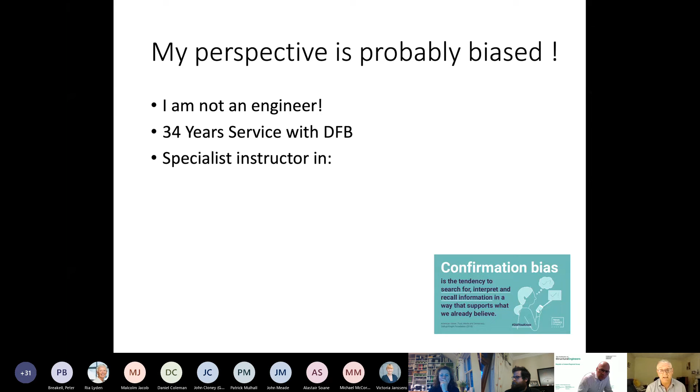I just want to tell you from the start that my perspective on this is most probably biased, because firstly I'm not an engineer, and I'm looking at this from a point of view diametrically opposed to yours. I'm in my 34th year in Dublin Fire Brigade, and my specialist instructor training is in compartment fire behaviour, tactical ventilation, breathing apparatus, and of course high-rise firefighting.

My first exposure to high-rise firefighting in terms of training was in the Petronas Tower in Kuala Lumpur. It's like learning how to fly a little bit in an F-16. So that was an interesting experience.

So what I really want to talk about is the project that I'm leading in Dublin Fire Brigade regarding how we're going to really deal with the changing built environment here in Dublin.

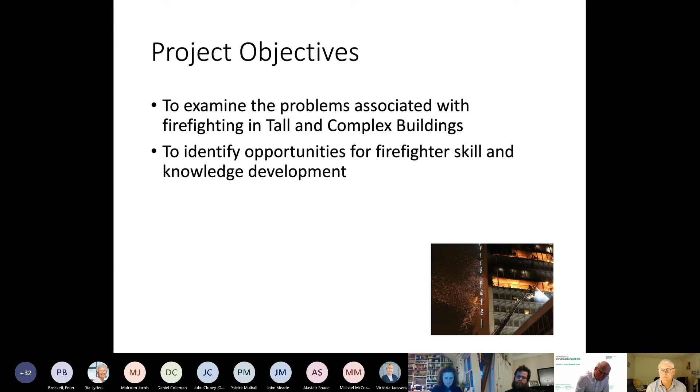Basically what we try to do is examine the problems associated with tall and complex buildings firefighting. We also identify opportunities for firefighter skill and knowledge development—that's a really political way of saying figure out what we're not very good at. We also wanted to implement a robust procedural and policy-based process so firefighters could operate safely in the changing modern built environment. So that was the overview of the project.

The very first question we had to ask is, what is a high-rise building? So we initially started by looking at Dublin City Council's development plan running from 2016 to 2022. If you look at the bottom of that table, they estimate low-rise runs up to 28 metres, medium rise up to 50 metres, and high-rise buildings over 50 metres.

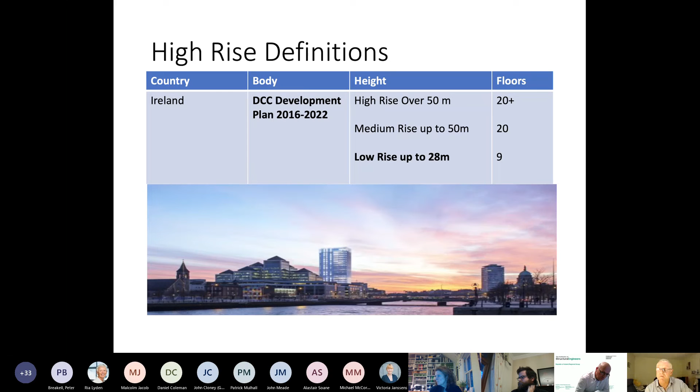When we started to look at that, the first thing that struck us was that the National Fire Protection Association in the United States classifies a high-rise building at over 23 metres. So immediately we started to think, why is one of the most experienced organisations supporting fire officers looking at high-rise at a much lower level than Dublin City Council?

To help us understand that better, we looked at the way they were zoning the city. If you look at the green area on that diagram, that's the zone for up to 28 metre buildings. The two purple circles are where Dublin City Council are going to build what they consider high rise—at Heuston Station and down at the end of the quay wall at Capital Dock. The other parts of the city, in the reddish pinkish colour, can build anything up to 50 metres. So in essence, the entire city is going to become a tall and complex city from our point of view.

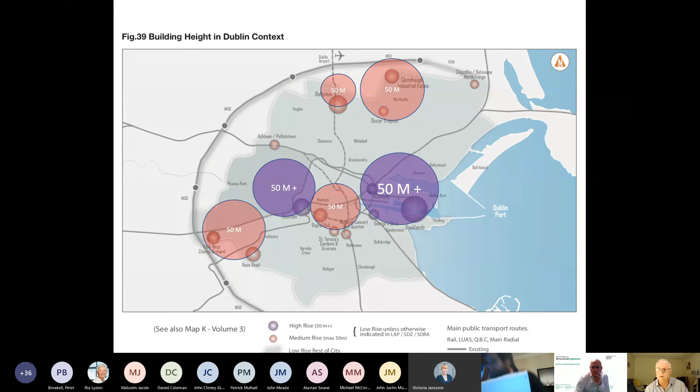So really we had to have a conversation with Dublin City Council, because they really pay for the fire service in Dublin. The conversation really was: how does the fire service define high-rise buildings as opposed to their perception?

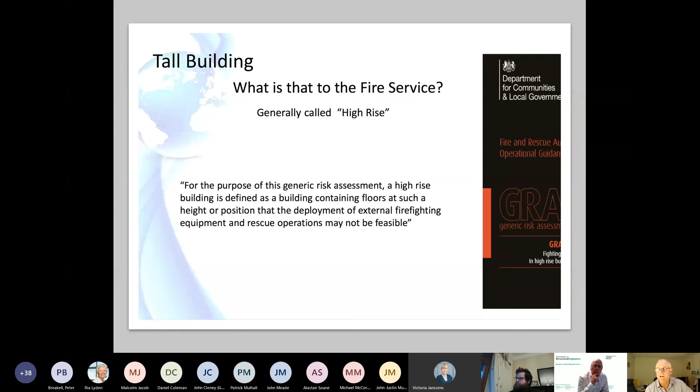So the starting point was our nearest neighbour in the UK, and their generic risk assessment says that for the purpose of this assessment, a high-rise building is defined as a building containing floors at such a height or position that the deployment of external firefighting equipment and rescue operations may not be feasible. That was really starting to look at high-rise from the perspective of the fire service, in terms of their capability to reach these buildings from the outside with their aerial equipment.

So we decided to look at the other side of the Atlantic, and one that really appealed to us—and ultimately to Dublin City Council—was Ottawa Fire Service's definition of tall and complex. In compliance with the British outlook, they define it as a structure beyond the reach of fire department aerial equipment because of height, setback, or location; structures that require unreasonable evacuation time; structures that pose a potential for significant stack effect, which I'll talk about later in more detail; and structures which require high-rise tactics. This could be buildings like hospitals, nursing homes, or buildings with firefighting shafts with provisions for the fire service to use.

So that really opened up everyone's view, and Dublin City Council were much happier then.

Instead of calling it high-rise, they were much happier calling them tall and complex, and so are we. So the key connection between different sides of the Atlantic, from a firefighting perspective, is that the reach of available aerial equipment really presented as the principal metric for defining tall and complex.

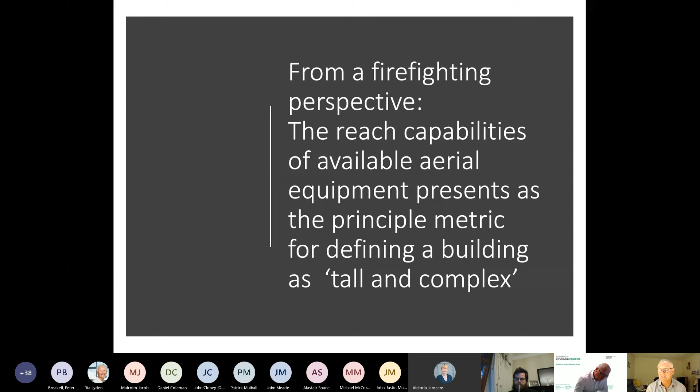So the next obvious question was, well, what can we reach? The tallest ladder or aerial device available in Ireland right now is a 30-metre turntable ladder. And that effective reach, when you allow for where the driver has to position it and the angle we can actually climb, is exactly 20 metres. That contrasts greatly with Dublin City Council's understanding of low rise, which is up to 28.

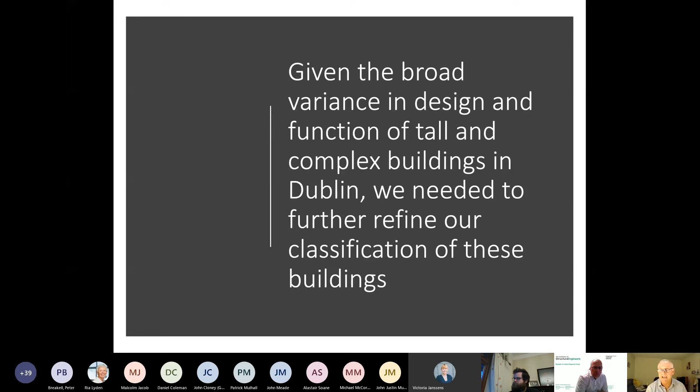Given the broad variance in design and function of tall and complex buildings in Dublin, we needed to further refine our classification of these buildings from the point of view of emergency planning, working out how many people we needed to send to fires in these different types of buildings.

So we broke them up into 3 categories. Type 1 is 20 metres or less, and these buildings we can reach with our aerial appliances. In terms of fire safety provisions, they will have protected stairwells and smoke management systems. They don't actually need to have rising mains.

Type 2 we suggested is buildings over 20 metres, meaning we can't reach them, and they would be residential only. The fire safety provisions provided would, to a certain height, include dry risers, firefighting shafts, firefighting lifts, and if they're over 30 metres, they probably get a sprinkler system. If they're over 60 metres, they would probably get a wet riser.

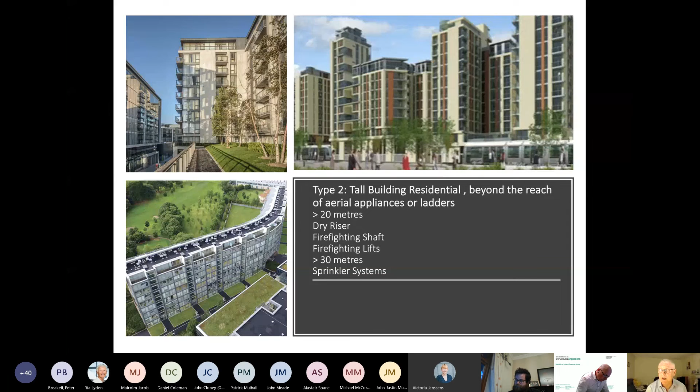Type 3 we said is a combination of either all commercial or mixed development, and it would have very similar features to type 2. The big difference from our point of view is the introduction of open plan office areas, which really changed the way we put out fires. We'll talk about that later.

The next section I'd like to talk to you about is our problem with fires in tall buildings, and the first thing I'd like to emphasize is fire behaviour in these buildings. To refer back to my background, I trained in Sweden in compartment fire behaviour, and I would have thought, up to the point I got involved in this, that I had a really good understanding of how fire actually behaves within buildings.

But to give you some background, Dublin Fire Brigade had a really solid culture of educating firefighters in the very latest understandings of fire behaviour. But it's probably fair to say their education was focused on fire behaviour in single residential style compartments, because that's where we do most of our work.

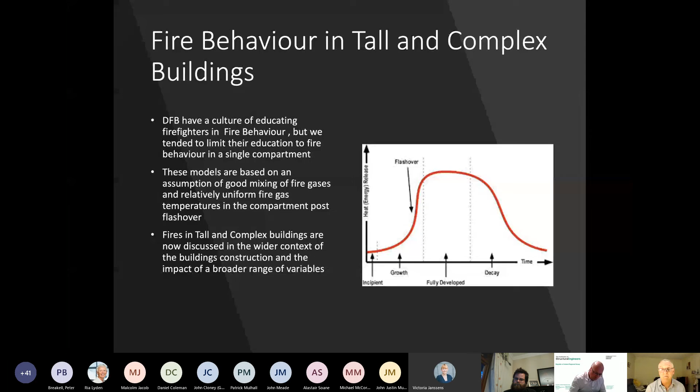The fire development or fire behaviour models that we used, and I believe you guys use as well, are based on the assumption of good mixing of fire gases and relatively uniform fire gas temperatures in the compartments post-flashover. Fires in tall and complex buildings are now discussed in our world in a wider context of the building's actual construction features and the impact of a broader range of variables on fire behaviour.

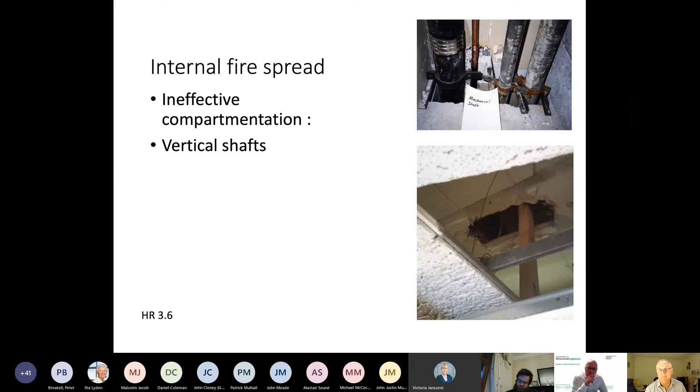So the question then would be, well, what are these variables? The first thing I'd like to talk to you about is internal fire and smoke spread in tall and complex structures. The first thing I would say, and this would probably be very much bread and butter to you guys, is ineffective compartmentation, really brought about by vertical shafts, unprotected service openings, ductways, faulty fire doors, and so on.

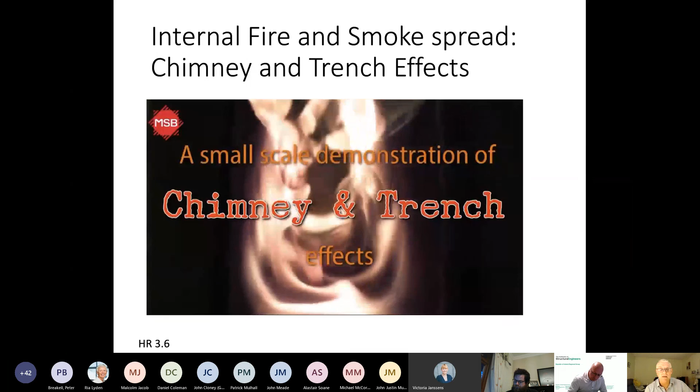But I would just like to add this short film to broaden our understanding. This short film comes from Sweden, and it describes fire behaviour inside structures that would produce chimney and trench effects. What they used to demonstrate this was basically two pieces of wood configured in a tubular fashion, one with a U shape and one enclosed. They started a fire at the bottom of these structures, which would represent stairwells and ductways in tall and complex buildings.

The first thing that we noted when we looked at this, particularly in the one without the four sides in it, was the speed at which the fire developed up this type of trench.

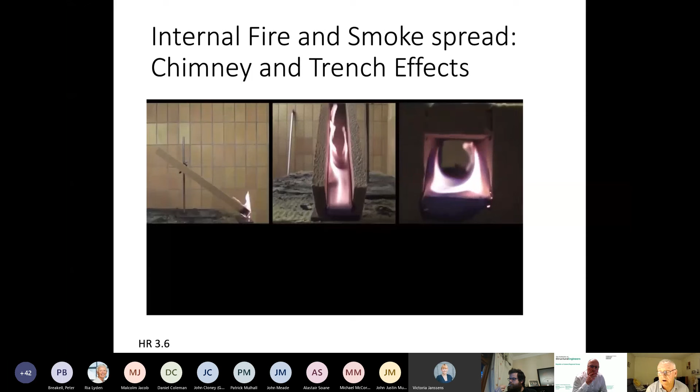Some of you might be familiar with this because this particular phenomenon was discovered in the King's Cross fire, where fires were developing up escalators at an incredible rate that hadn't really been characterized before. The fire on the right-hand side would be fires developing in shafts, ducts, in some cavities and so on. The first thing we noted was this was not behaving like our understood model of fire behavior.

So from the point of view of identifying areas to evacuate in a building, depending on the height of the building and the time of year, and specifically the temperature differential from the inside of the building against the ambient temperature outside, we could expect smoke movement that was totally foreign to us. When we were evacuating these structures, we realized we had to think about this quite differently.

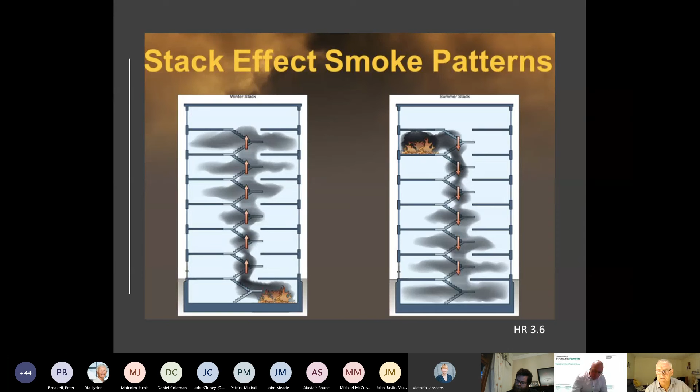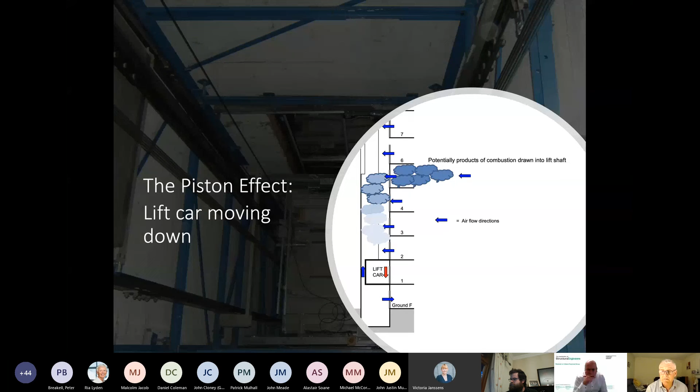The next thing we wanted to talk about was lifts and lift shafts, and the understanding of smoke movement when using firefighting lifts. In essence, the piston effect of the movement of the lift will draw in smoke as the lift is going down, very similar to a syringe and a plunger within a syringe. And as the lift goes up, it was causing smoke to be pushed up into different parts of the building.

Bearing in mind that the normal lifts will be out of function during a fire event, we will be using the firefighting lifts an awful lot during our operation to move firefighters, equipment, and to move injured people down. So again, smoke coming out on floors that we weren't anticipating was something we had to make people aware of.

The next thing might come as a surprise to people in your profession: the negative impact of smoke management systems and ventilation systems within tall and complex buildings. I refer, of course, to smoke shafts and automatic opening vent systems.

The first thing we really want to bring to the table here is the understanding of a concept called ventilation flow paths, and the preponderance of pressurized fire gases to seek areas of lower pressure to move to. The areas they want to move to most readily are the systems put in place to actually stop smoke propagation in the buildings we're trying to protect.

So I'm going to show you a ventilation flow path coming from the bottom of a stairwell to a ventilation opening at the top of a stairwell. The first thing you will note is that the smoke is turning 180 degrees and moving up the stairs, and very little smoke is actually moving out to the vent that's obvious on the right hand side, the door that's open. The smoke is most likely to depressurize towards the tallest or highest vent.

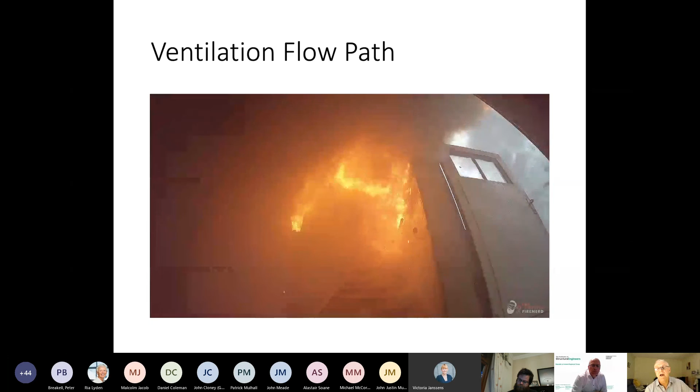Now, as the smoke layer heats up, it's going to ignite, because an awful lot of people don't realize that smoke actually burns. You can see a very clear ventilation flow path forming of the fire gases moving towards areas of lower pressure. Picture in your minds this event occurring where an apartment is left open and the burning smoke is moving towards AOVs and smoke shafts. This is a better indication of what I'm talking about.

On the picture on the right, you can see an automatic opening vent, and the picture on the left showing a smoke shaft.

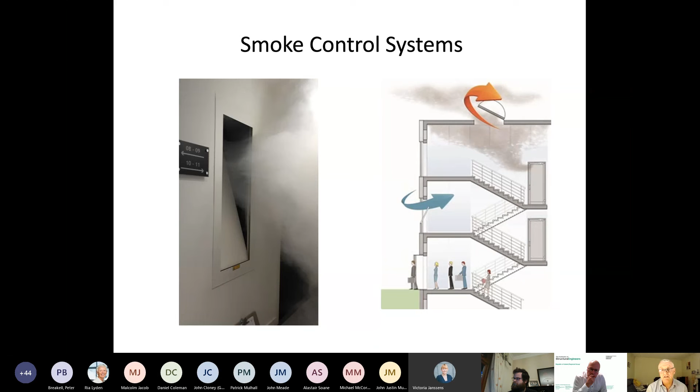If a firefighter was to leave a firefighting shaft and a smoke shaft was functioning, or the door was open into the firefighting shaft and it was feeding the AOV, the flame and burning smoke will be moving towards the firefighter. We would suggest that the smoke shaft is in precisely the wrong position to support firefighting operations. They're placed near the building core, usually for financial reasons and ease of construction, but we would suggest they should actually be placed at the furthest point away from the stairwell.

The next thing I'd like to move on to is the exterior influences on fire and smoke spread, specifically the effects of wind. I'm going to show you a film of a fire we attended on Fenian Street. If you look carefully, the wind is very clearly moving from the right to the left, and there are firefighters inside that building now.

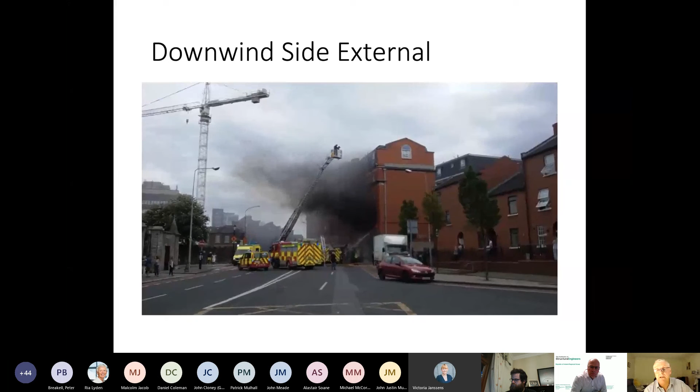It is not following a typical Coanda effect. The flame is moving out horizontally. What I need to tell you about that fire is that a policeman, a Garda, actually broke a window on the upwind side of that fire. And when the vent through window failure opened on the opposite side of the building, basically what you are seeing is this, the flame coming out horizontal.

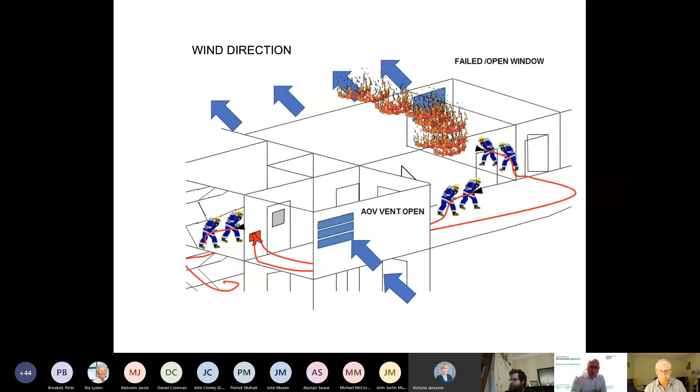What I would like you to imagine is if the wind was blowing the opposite direction, the actual flame would come back at the firefighters, which I'm going to show you later. Wind-driven fires are not uncommon.

I would like you to imagine if a firefighter was coming from the other side and this happened, you would end up with this here. This is a wind-driven fire, and as you guys would know, there wouldn't be a huge fire load in a corridor or a lobby for that matter. What you were looking at was the burning fire gases in a blowtorch effect heading towards a smoke control mechanism.

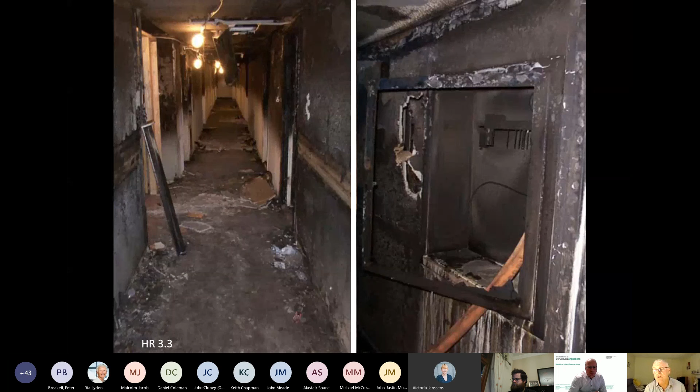I would like to move on to exterior or external fire and smoke spread, and tell you something you probably already know. There are 6 types of external fire spread, and the Coanda effect probably describes the phenomena very well. But I would like you to consider combustible window sets, external ACM or MCM wall cladding rain screens over combustible insulation.

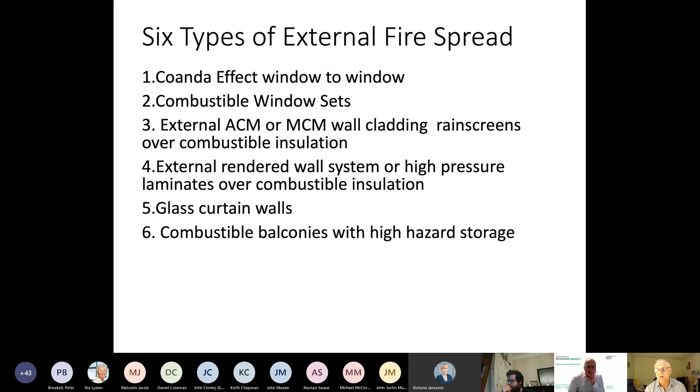I would like you to consider external rendered wall systems or high pressure laminates over combustible insulation. I would like you to consider, in commercial buildings, glass curtain walls. I would like you to think about combustible balconies with high hazard storage. And I'd like you to look at these in a bit more detail.

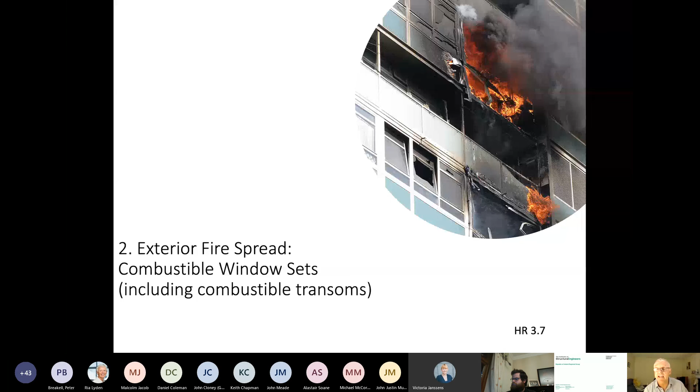The first structural component we are now considering greatly is combustible window sets, including combustible transoms. You're looking at the Lakanal House fire in London in the picture, which was renovated 4 weeks before the fire, and the people who died stayed in place at the behest or instruction of the fire service.

The next one is exterior fire spread, which is pretty much well discussed now: external ACM or MCM wall cladding, rain screen over insulation. This one is not as well noticed in the city as it should be, because it's rendered over insulation that's combustible, and it looks, shall we say, a particularly standard finish to a lay person like myself.

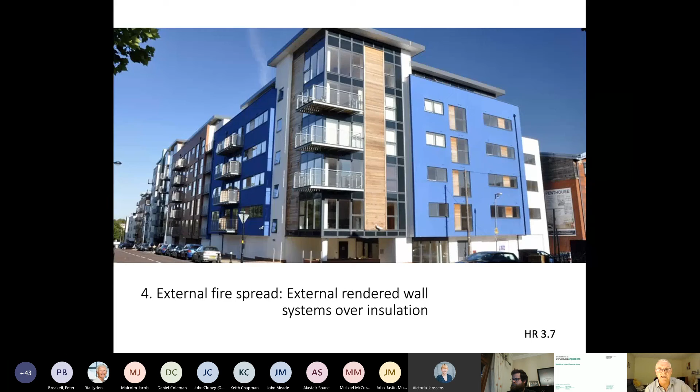The curtain wall phenomenon is common in that if the curtain wall is installed and fire stopping is not installed, instead of having this nice fire stopping function, we get the fire moving from floor to floor up along where the curtain walls are actually attached to the building.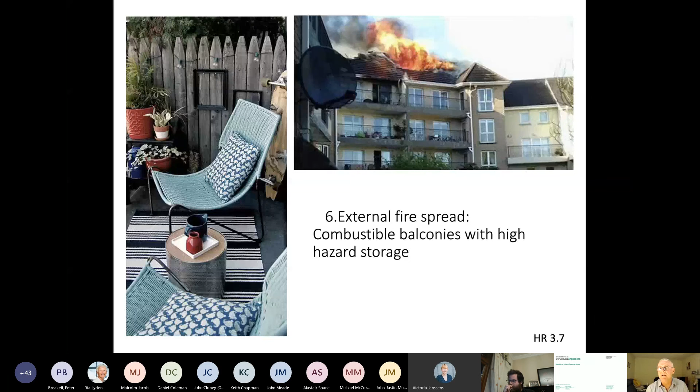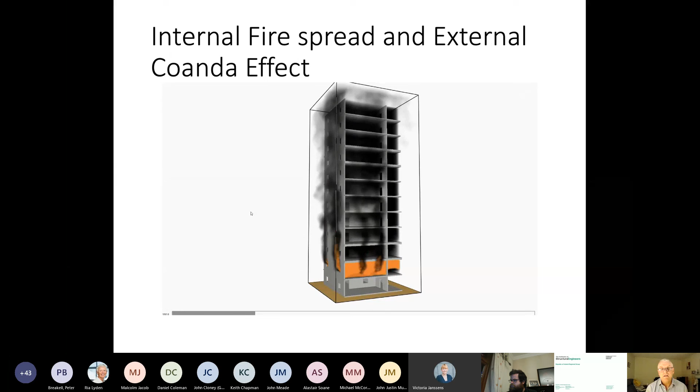So if you take a look at this representation, what we're seeing here is internal fire spread through cavities and voids, through people not leaving or closing fire doors, and you're seeing some smoke moving up along the building, showing a typical Coanda effect.

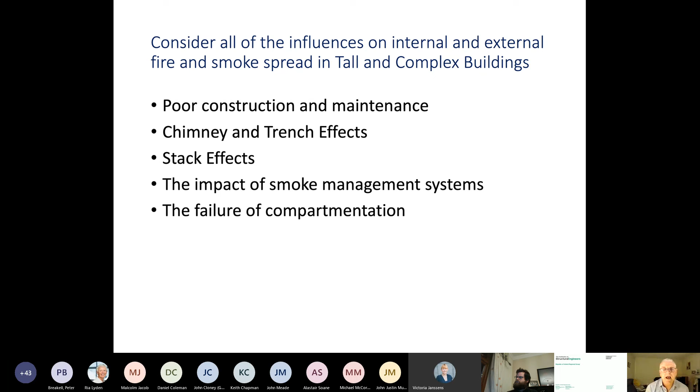So if you were to consider all of the influences we've discussed on internal and external fire and smoke spread in tall and complex buildings, and add in poor construction and maintenance, the chimney and trench effects we discussed earlier, the unusual smoke movement and patterns, the impact of smoke management systems, the failure of compartmentation, the effects of wind, and now add in combustible exterior cladding systems. Now, I should warn you in advance, I'm going to show you a video, and some of the language is a bit choice, but I think it's useful to understand when you combine all of those variables.

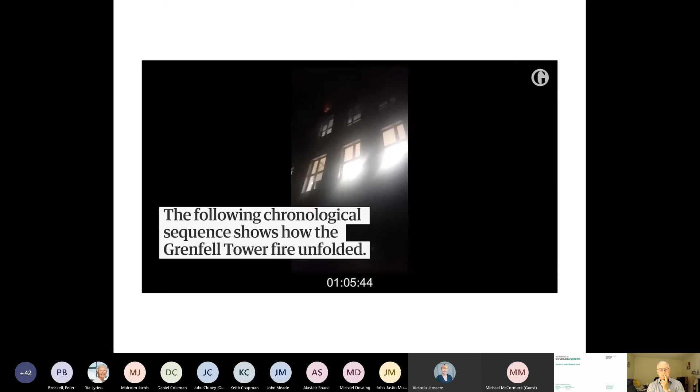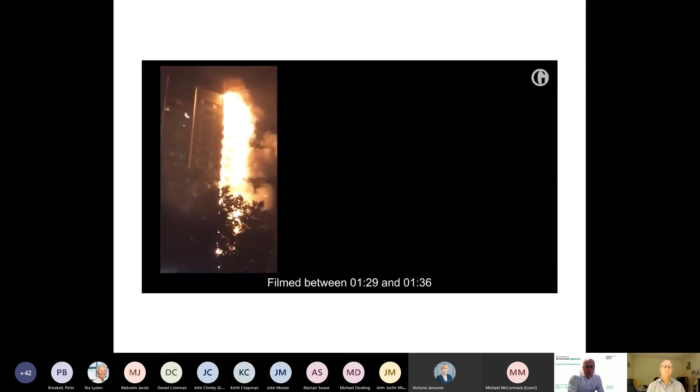Fire Brigade? Yeah, hello, hi, in the fire, flat 16 Grenfell Tower. Sorry, a fire where? Flat 16 Grenfell Tower. The Fire Brigade are on their way. Are you outside? Yeah, I'm outside. Yeah, well, the fire engines are on their way. Just tell me how many floors you got there. It's the fourth floor. Right, okay. Quick. They're on their way already. Yes, I know it's burning, but they are on their way. You've only just called, as long as you're okay. Yeah? Okay. Fire Brigade! Look, the house. Yikes. Going up 2 floors and coming out the 7th floor above the gym. It's going. That's going, they need to get up there, that's not fair enough. Oh, block 1. Look, at Grenfell Tower at like 1:30 in the morning. Fucking hell, fire, and that's getting bigger and bigger. People are gonna die, and I'm scared. Man, you see that shit pull up? Wow. Go! Wow. It's gonna go right to the top of that building, isn't it? Oh my God. It's gone all the way. And there's instant lights in there.

The thing is, this was the world changing for the fire service, in that the concept of defend in place, or stay in situ, was suddenly called into question.

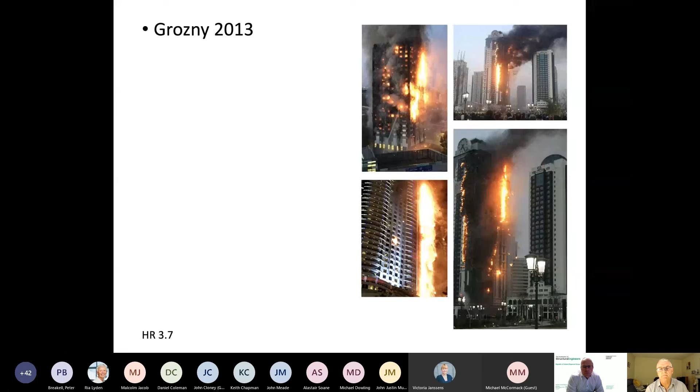And when we looked at this more closely, it certainly wasn't a unique event. Looking at three of these exterior combustible cladding fires, Grenfell was one of the slower developing fires, and the fastest one was in Dubai in 2015, where the fire was actually moving at five floors per minute.

So what I would like to say to you is that we have a very strong association with the British Fire Service, and we have very close contact with them. And to suggest that this is anything other than a game changer would be underestimating the impact that this has had on all of us, and I'm sure all of you.

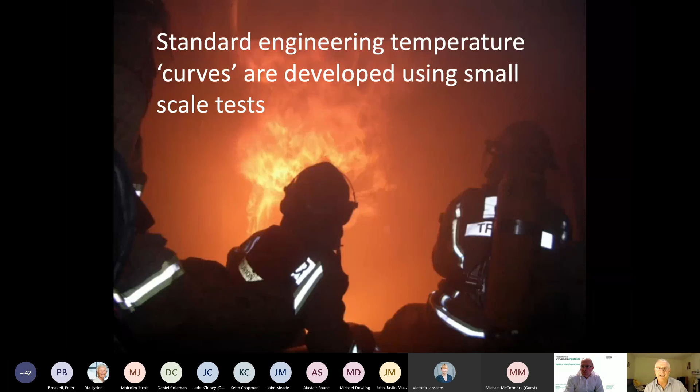So the design of these buildings is based on a lot of engineering assumptions. What we'd like to add into your thought process is the complete revolution in materials that has occurred in the last 25 to 30 years.

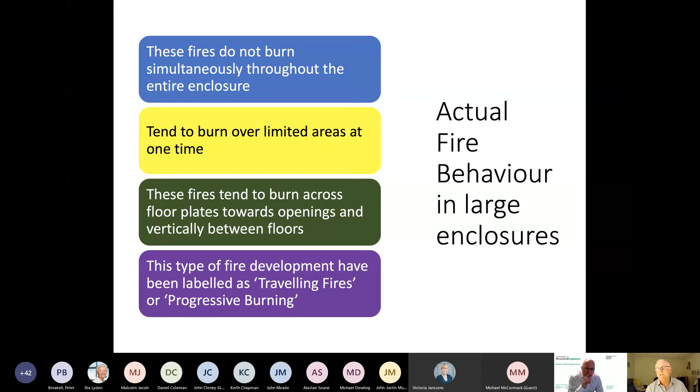This is something we did not teach firefighters up until about 6 months ago. In travelling fires, the flame front spreads around the floor plate towards openings. As it travels, the burn consumes the flammable contents, but there's no cooling effect behind the flames. So smoke ahead of the flames preheats and post-heats the structure, causing it to lose strength. This is a pretty typical example.

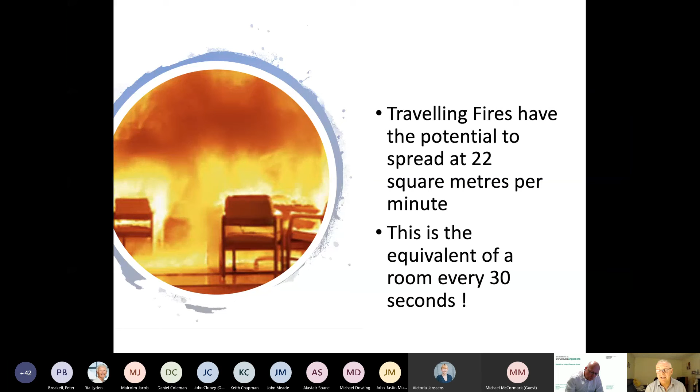The potential of travelling fires is to move at 22 square meters per minute, equivalent to a room every 30 seconds. So I'm going to show you an old test film that was done about the Stardust fire.

At the time, the knowledge of fires was based on compartment fire behaviour, and this was actually sent around the world as an example of flashover. But what it actually was, when you look at it with a new set of eyes, is a travelling fire.

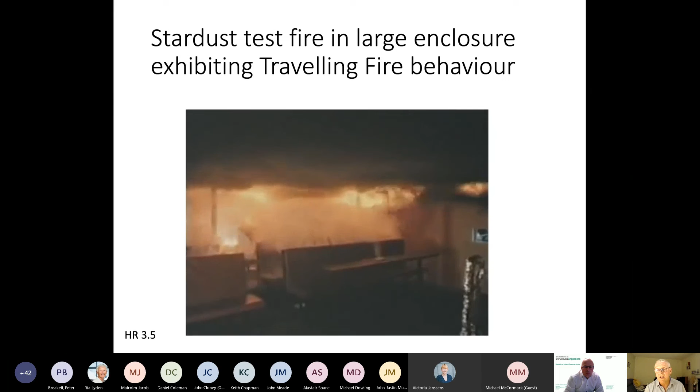So when I play it, note the preheating of the fuels in front of the fire, and then the acceleration of the fire across the fuels ahead of it. Notice the fire gets quicker and quicker, moving like a tsunami wave. This is actually a travelling fire, not a flashover as it was described in the era of the Stardust tragedy. You can see this fire ran out of control.

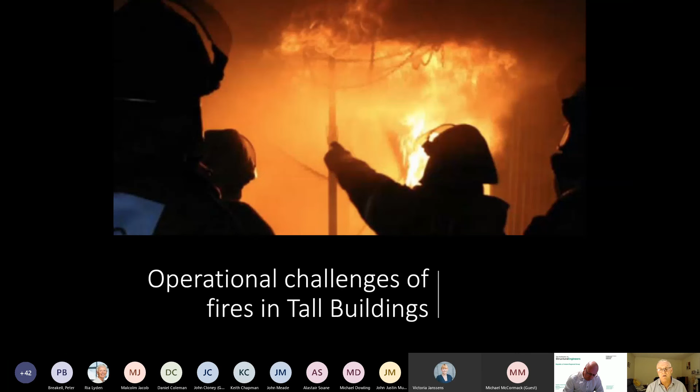That's a really good indication of what will happen in an open plan design. So having put the fire behaviour concepts behind us, this really helps inform what the operational challenges for the fire service in these buildings are.

First and foremost is the obvious: height and complexity, in that access to floor levels may be beyond the reach of our aerial appliances. If you look at the Grenfell tragedy, you can see that's the highest the aerial appliances could actually reach in that fire. What this means is that it limits the fire service operation to interior operations only. So in effect, the concept of treating a fire as a defensive, stay-out operation has been eliminated. We have to commit firefighters, as London Fire Brigade found in the Grenfell disaster.

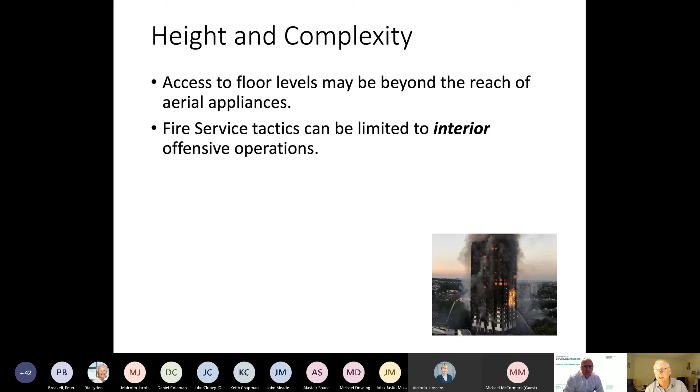The next component is that firefighters are faced with considerable physical challenges to transport and deploy resources. In a normal fire, we can walk outside and the fire engine, which is a giant toolbox, is easily accessible. Our guys may have to climb 20 floors instead.

Now I'll give you an idea of what they're carrying. The personal protective equipment you're looking at there, the trousers, boots, upper assembly and helmet weighs about 12 kilos. The breathing apparatus weighs another 12 kilos, bringing you to 24, and firefighters have to carry 20 kilos up with them. So that's 44 kilos, climbing 15 to 20 floors before they even start work.

The next thing I'd like to talk about is a concept called reflex time. Bear in mind the standard time to flashover that's discussed is about 3 to 4 minutes. And bear in mind, in an open plan fire, that fire can consume an area of a room every 30 seconds.

From the time it takes us to arrive at the fire and go up these floors, it can take up to 20 minutes to get water on the fire for a well-trained crew. It can often take longer for us to travel from the ground up to the fire floor than it did for us to drive from the station to the building on fire.

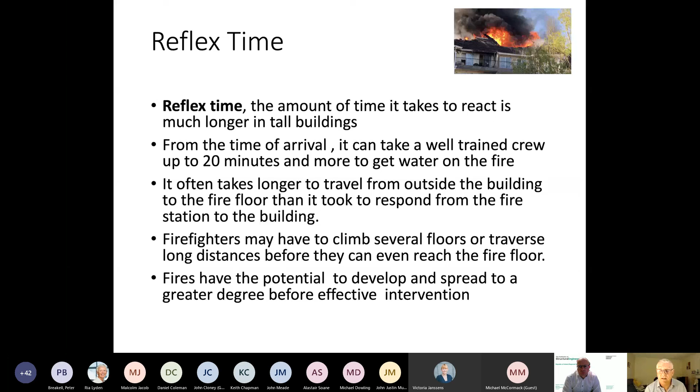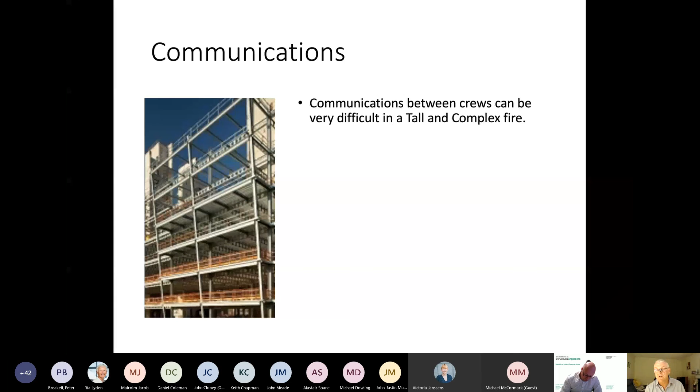The next big challenge is communication and the extensive use of steel in modern buildings, and they act as a Faraday cage. So what that does is it prevents our radios working in these structures, because the Faraday cage effect stops radio signals going from one floor to the next.

Communications to residents by operational crews is actually near impossible, because most of the buildings don't have a PA system as they do in the United States.

So we can't give advice to the residents whether they should stay or whether they should go from the incident commander on scene. So we don't install PA systems.

The next thing that acts as a considerable issue for us is command and control. The size and complexity of these incidents require a huge amount of firefighters. Now, I'll give you some idea.

An average house fire, you would have 12 firefighters at it. The Metro fire had 67 firefighters at it for 3 hours.

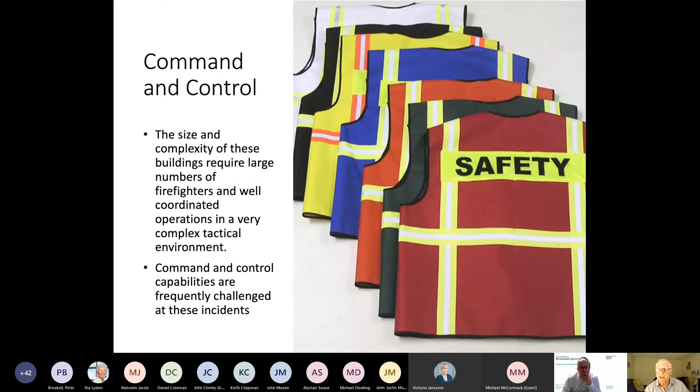And to try and organise command with difficult communication is extremely challenging for incident commanders. Our experience to date is that we find difficulty in managing our resources, and we're having to change our practices to cope with that.

What I would like to move on to now is the fire safety features provided by the building regulations, but from a firefighter's perspective. So the first thing is that firefighters depend on the functionality of fire safety features in these buildings far more than low-rise buildings.

Because if a firefighter gets into difficulty in a standard 2-story house, he can literally run down the stairs. We can't do that in these buildings.

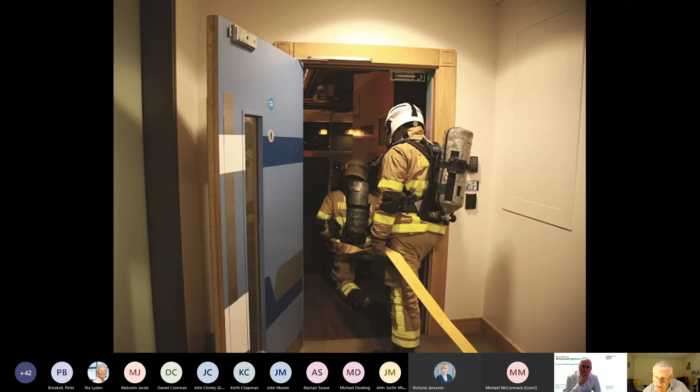Have a look at this video. This is in New York, and you can see when the firefighter forces the door, smoke fills the stairwell.

Sorry, fills the corridor, which means the occupants on that floor cannot leave. Smoke management systems cannot deal with that quantity of smoke.

They're designed to deal with a smoke production of the door closing behind the offending apartment. They're not designed to deal with actual quantities of smoke produced by real fires.

The next thing I want to talk about is compartmentation. Our ability in the fire service to control this fire is heavily dependent on the standard of construction and the fire safety management of that building post-construction.

This is a fire I referred to earlier. This is Lakanal House in London, and you can see that the fire started here, and you can see that the fire has spread up multiple floors, despite the fact that that building was renovated 4 weeks before that fire.

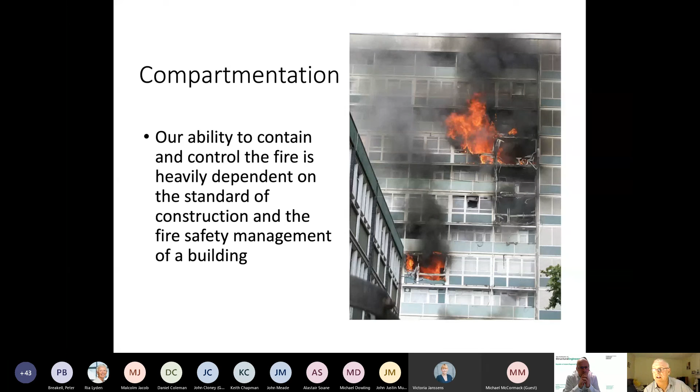The other aspect about compartmentation, and this is the Metro fire again, these are residential apartments, and the fire compartmentation fails, and this is by regulation, after 30 minutes between each apartment.

Which means that we're dealing with open plan fire behaviour, not compartment fire behaviour. And the likelihood of travelling fires is increased because the compartmentation isn't designed to last any longer on that.

This is a 2-floor fire, and you can see there's no compartmentation on this floor because it's burned through. There's no compartmentation on this floor because it burned through, and the fire spread because of opening smoke management systems.

The next thing I'd like to describe is the dry and wet rising main systems provided in different sets of legislation. Dry riser systems can be compliant with BS 5306 or BS 9990 typically. The maximum static pressure we can put into those pipes from our pumps is either 10 or 12 bar, depending on the standard used.

Wet rising mains can follow similar standards, and they have pressure limiting devices on each outlet at 5 or 8 bar, depending on the standard. These limit the amount of water we can put on the fire, which I'm going to talk about in detail in a moment.

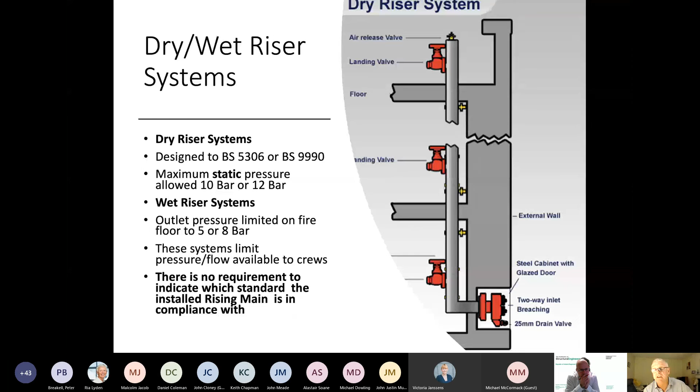This is a big problem in England. Fog nozzles will not function reliably in dry and wet rising main systems. Surprisingly, perhaps from an engineering perspective, fog nozzles are the standard type of nozzle used for firefighting in the modern era. All our firefighting techniques, which came from Sweden, are predicated on the use of fog nozzles, and we cannot use them using dry and wet rising mains.

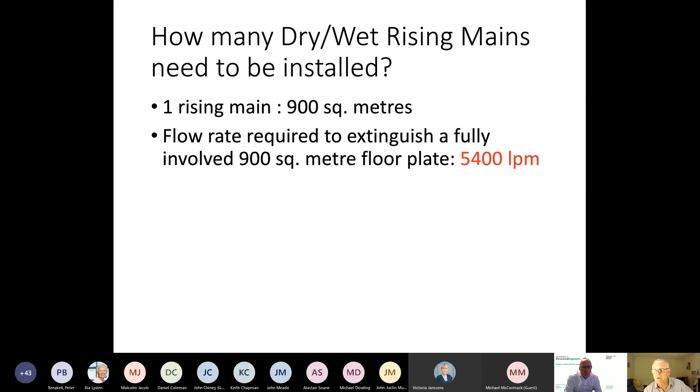The next problem we have is the amount of dry and wet rising mains that have to be installed. The standard in the building regulations is 1 rising main for 900 square meters. The flow rate required to extinguish a fully involved 900 square meter floor plate is 5,400 litres per minute. So you can see there's a serious shortfall in the water supply that's actually regulated for.

The flow rate that we can actually get from dry rising or wet rising mains is 1,500 litres a minute maximum.

So we're going to talk now about building a residential tall building, and the guidance documents commonly in use are typically TGD B. It's superseded, as you guys know better than I do, by BS 9991 2011.

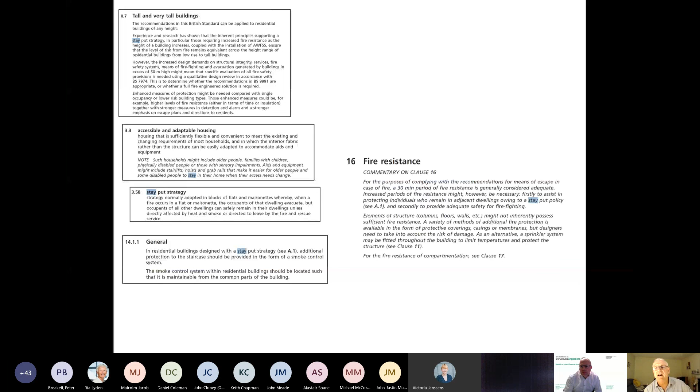In these documents, stay put is explicit. It's not a notional idea or an a la carte idea, it's actually explicit. This design philosophy impacts on the number and width of stairwells required in these buildings. The minimum width, as you guys know, is 1.1 meters. And if you look at the guidance documents I've referenced, stay put is not tacit, it's explicit throughout the document. So how does this engineering stay-in-situ strategy interact with the Irish fire alarm standards?

Well, let's have a look at the British and the Irish. In Ireland, the L3X or LD1 standard looks for localised smoke detection in each apartment, not connected to the fire alarm system. So if smoke develops in an apartment and the apartment fills with smoke, compromising those residents, it doesn't have to show up on the communal system in terms of the addressable panel, or sound anywhere else in the building but the apartment.

There's a heat detector, you guys know, in each apartment, set at 70 degrees centigrade. They don't always go off. On the UK system, they've localised smoke detection and alarms, with no communal alarm system built into their apartments, and the communal alarm system is based in common areas only.

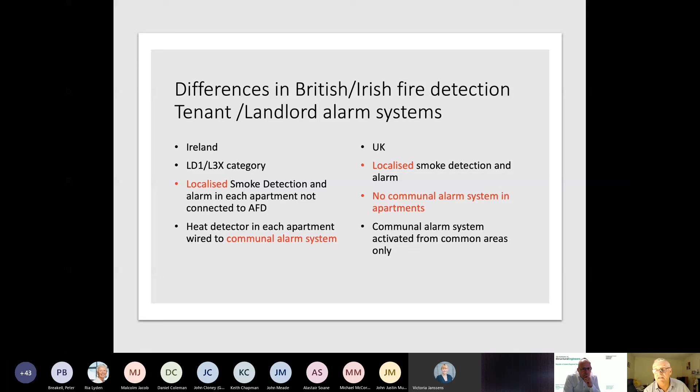So what does this mean? Well, okay, engineering stay put strategy is embedded in BS 9991. This standard facilitates narrow single staircases in tall and complex buildings because there's no need for everyone to evacuate. Then the Irish standard encourages a full simultaneous evacuation, which is a direct contradiction with the designs of the means of escape. So what does that mean?

A real world example: this is an apartment block in South County Dublin. It's 16 stories. There's a single stairwell. There's 4 apartments per floor. There's a wet rising main. There's an L3X standard. There's a smoke shaft in the corridor, which we discussed earlier as problematic, and the controls for the smoke shaft are in the corridor. The AOV is a supply air system in the stairwell, and it's a 2-story below surface underground car park. Here's this building.

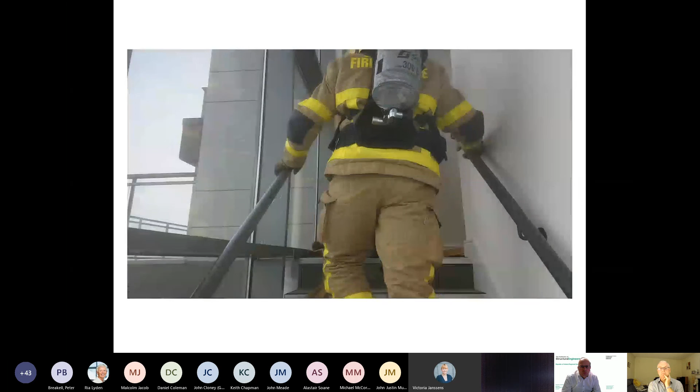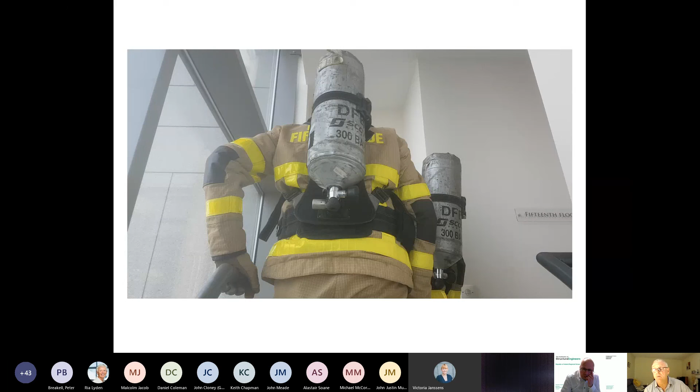This is a building designed to a standard that supports stay put, but it's a building that has an alarm system that encourages full evacuation. Looking at the width of that single staircase, can anybody listening to me make an argument that people could leave that apartment block while we're going up?

So the escape routes we're most likely to encounter are going to be heavily congested with evacuating occupants during our operation. This could compromise both the evacuation and the firefighting operation. So to be honest with you, if I was being diplomatic, I would suggest that this is suboptimal.

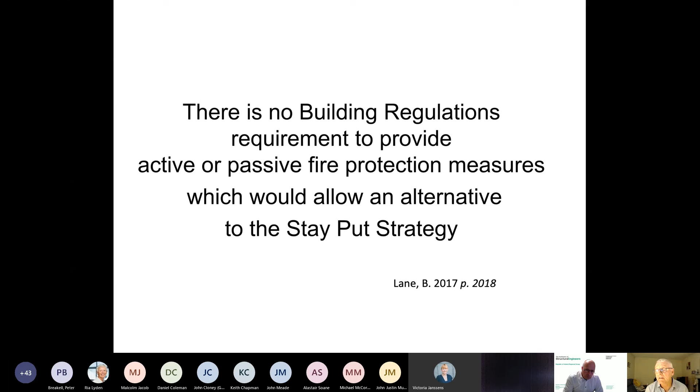After the Grenfell inquiry, a very eminent fire engineer from Ireland called Barbara Lane gave evidence, and her evidence contained this statement: there is no building regulation requirement to provide active or passive fire protection measures which would allow an alternative to a stay put strategy. I think that's an extremely telling comment, and it's something we should all reflect on with regard to Irish standards.

So the first question we have to ask: how well do our buildings comply with the regulations and the design intent? How good is the fire safety management post-construction? It's clear we don't actually know.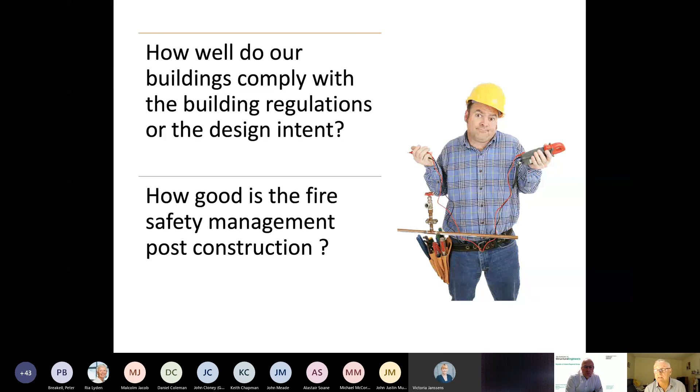So in terms of a summary of the operational challenges, we have a big issue with stay in situ, and it's an engineering strategy, not a fire strategy. We have a big problem with the smoke control systems design, a serious reservation about dry and wet riser design, and misgivings about how well buildings are managed post-construction, and foundationally, how well they're built in the first place.

So you can see our dilemma. You might ask, what did we do about this? Well, the first thing we did is we took a really hard look at ourselves, and that's not as easy as you think. To look inwardly and critically is never easy.

We decided we needed to have a benchmark of where we needed to be. So we spoke to our international colleagues, and interestingly, we didn't speak to London Fire Brigade, and it'll become clear in a few minutes why. We carried out an academic literature review of international best practices, identified realistic high-rise emergency planning scenarios, then undertook over 2.5 years, over 20 full-scale exercises, with anybody that would let us into their buildings, and performed a gap analysis of where we'd like to be and where we were.

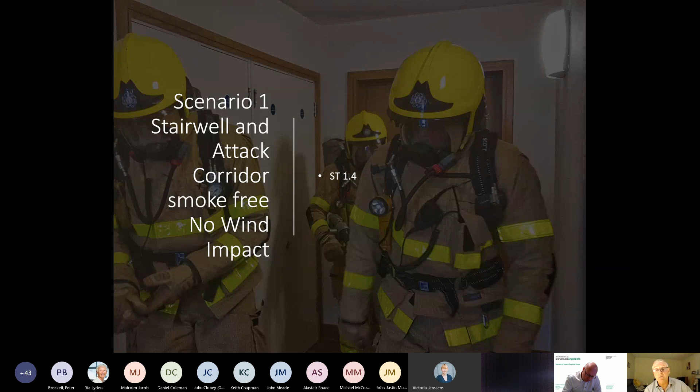So the first scenario that we are training to now is the stairwell and attack corridor are smoke-free when we arrive, and there's no impact of wind.

The second scenario is the smoke-free stairwell is going to be there, but the corridor or lobby is going to be contaminated with smoke because somebody left their front door open or wedged it open, or perhaps it burned through.

The third scenario is smoke ingress to both the stairwell and the attack corridor. This would be in a building that has poor fire safety management and we've got door wedges all over the place.

Scenario 4 is a wind-driven fire. Scenario 5 is a commercial open plan fire. Scenario 6 is building failure.

This is really at the leading edge of emergency service thinking internationally, in that we're now teaching our fire commanders to look for indications of when a building's facilities and structures are actually failing, and our strategy should go from a firefighting operation to a full emergency evacuation. I'm sure that resonates with anybody who studied the Grenfell tragedy.

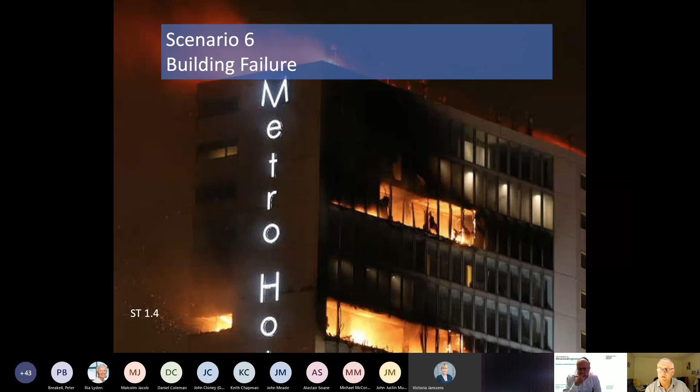The 7th scenario is underground car park fires, with particular emphasis on electric vehicles. We could actually do a conversation about them on their own tonight, but suffice to say, extremely problematic.

So what did we do then? Well, we really got involved in the development of key principles for tall building operations. This was driven by a wave of operational intelligence that we really need to get to know the buildings that are out there really, really well.

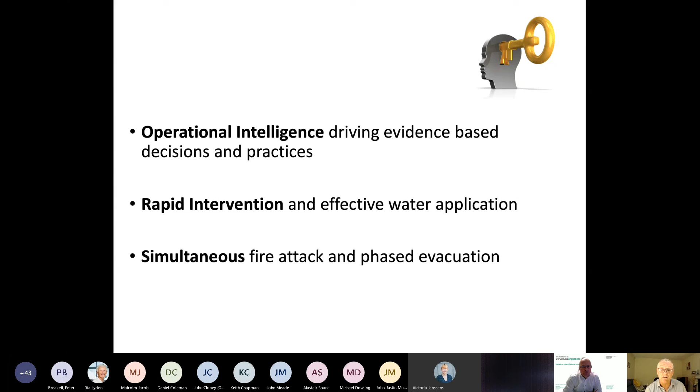The concept of rapid intervention, as quick as anyone in the world at getting water on these fires. The concept of simultaneous fire attack and phased evacuation at every incident. I would hope you would look at the last one there and consider stay-in-situ engineering strategies, because I'm going to talk about that in more detail.

So we noticed some development opportunities in our own skill base, and that's the code for things that we were really crap at. The first thing was to make sure we adopted evidence-based firefighting tactics. We needed to improve the way we gathered and disseminated operational intelligence about the buildings.

We needed to minimize the reflex time to get water on the fire. We had to enrich our knowledge of how these buildings are being built nowadays. And then we had to develop skills in deploying hose in very, very confined areas.

I showed you a video of how small those areas are in firefighting shafts. We also had to get good at working firefighting lifts. They seem like a brilliant idea, and they are, but they have a huge amount of danger associated with their use, and we had to get good at managing those hazards.

And then we had to adapt our firefighting and rescue techniques to suit a new built environment. We had to improve our staff understanding of tall and complex building fire behaviour. We also had to develop tall and complex EMS operations.

Just to give you a simple configuration in your minds of that: if an ambulance pulls up at a tall building on fire, can the ambulance crew go into the building to help somebody? No, they can't, because they don't have breathing apparatus or firefighting gear. So we had to develop contingencies that we, as Dublin Fire Brigade, would act as the pre-hospital care within burning buildings, which again is quite unique internationally.

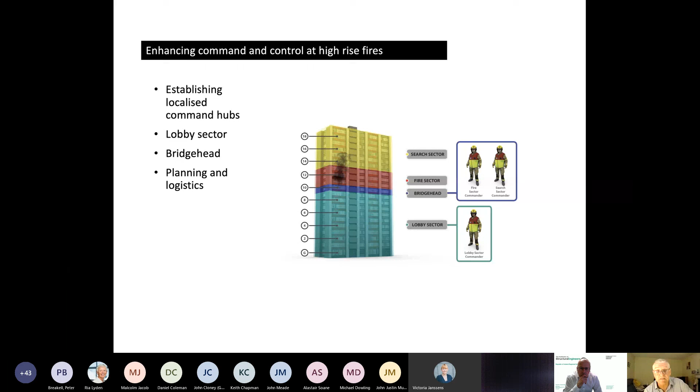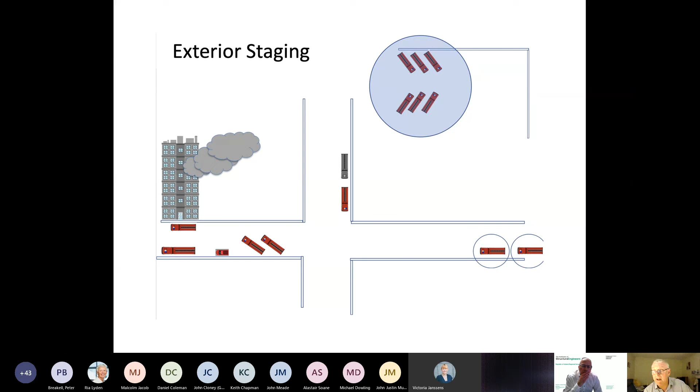We had to learn how to deploy our vehicles differently. Because there's so many fire engines needed for these incidents, we had to start parking the resources a block away, rather than clutter up the fireground and limit ambulances coming in and out of the area. So we had to learn how to deploy differently.

We had to develop fast, frugal heuristics — in other words, flow charts or decision support tools for the incident commander. The tactical complexity of dealing with these fires, I haven't got time to explain here. So we had to actually equip our incident commanders with very simple checklists so they could figure out the best way to deal with the event tactically.

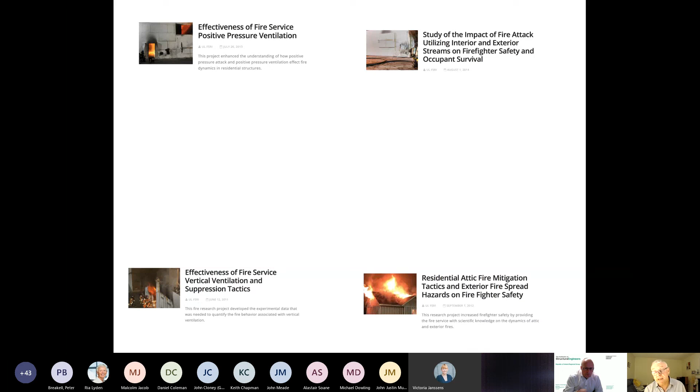Moving on from this application of evidence-based firefighting, we were using research from Underwriters Laboratories in the United States, who have produced a suite of research documents into firefighting tactics. We found them extremely useful when convincing ourselves that change was necessary, because the material is peer-reviewed academia, and it makes convincing a non-believer much easier when you have academic material to support change.

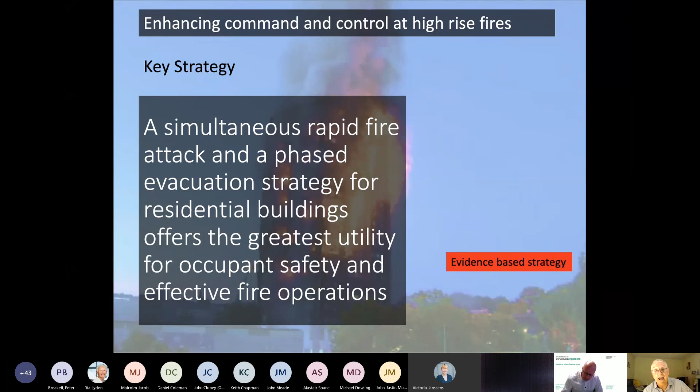The key strategy for Dublin Fire Brigade at these buildings will be the concept of a simultaneous rapid fire attack and a phased evacuation strategy. We found that this would offer the greatest utility, and we will not be going with stay in place. That's a very key policy decision by Dublin Fire Brigade. We don't have confidence in the buildings, in the compartmentation, or in the maintenance of the buildings post-construction.

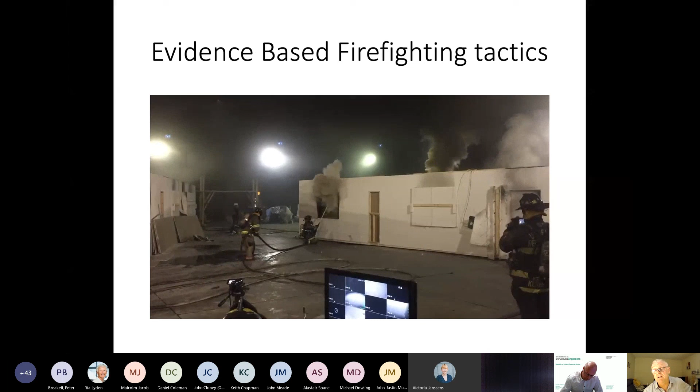I'm going to show you an evidence-based tactic - please take note of the angle that the water is being applied. It's particularly fast, and it's a technique developed by Underwriters Laboratories that we've adopted. It's called transitional attack. Again, we had to go backwards with the smooth bore nozzle to achieve an adequate flow.

The next thing we've actually incorporated, and we had this in place before Grenfell - the single biggest criticism placed on London Fire Brigade was that their movement of firefighting shafts necessitated the opening of fire doors, which meant that the firefighting shaft became filled with smoke and people couldn't use the escape. So we quickly realised we had to come up with a solution for this, and we purchased this equipment.

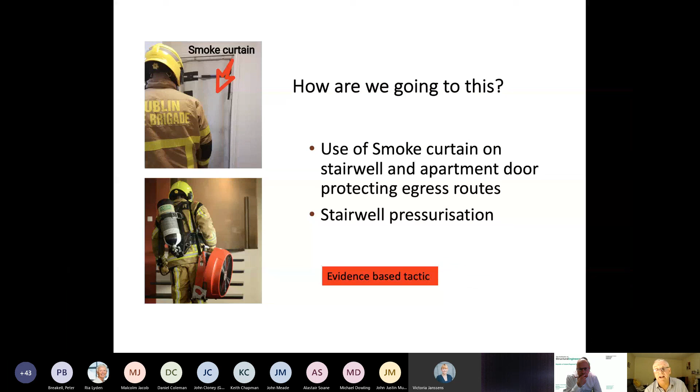If you look at the top picture, it's called a smoke curtain - a portable device on a frame that we can mount on doors as we go onto corridors, which stops smoke going onto the stairwell. At the bottom of the picture, you'll see an electric positive pressure ventilation fan, which allows us to combine the two concepts and pressurize the actual stairwells. This smoke curtain is a revolutionary concept designed by Professor Michael Reick in Germany, and it allows us to overcome the problems presented by the design of firefighting shafts.

This is a smoke curtain that we actually used at an incident - it was a hospice, and this is the escape route in the bottom picture. In the top is the actual fire compartment, and this picture shows you how effective the use of the smoke curtain is in preventing means of egress being contaminated with smoke.

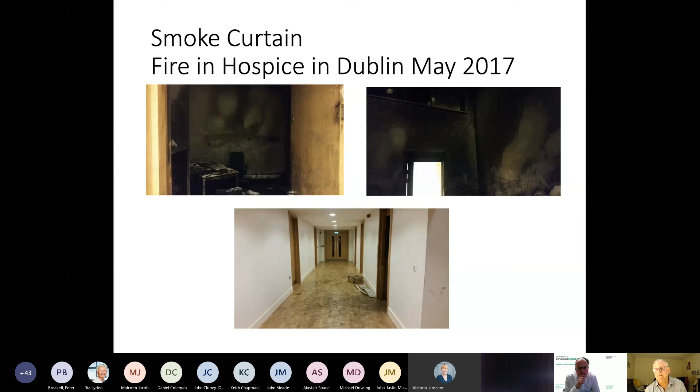Positive pressure ventilation fans will allow us to create a positive pressure in the firefighting shaft, which will also assist in maintaining means of escape. We realised that if we bought the biggest aerial device in the world, the floors available in modern construction in Dublin will always be taller than the capabilities of that ladder. So we bought another piece of equipment - this is a floor below nozzle, which we can effectively use to put water on the fire at any height, because the curvature in this nozzle allows us to use it, as the name suggests, from the floor below the fire, even if it's higher than the turntable ladder's capability.

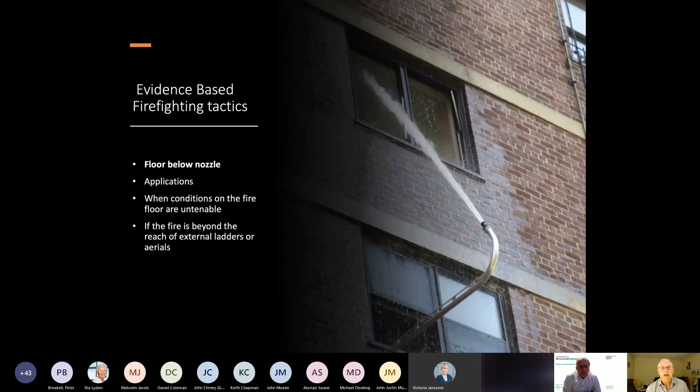So in summary, and I know I've been controversial and at some stage maybe even adversarial, I'm just going to give you the main ideas here.

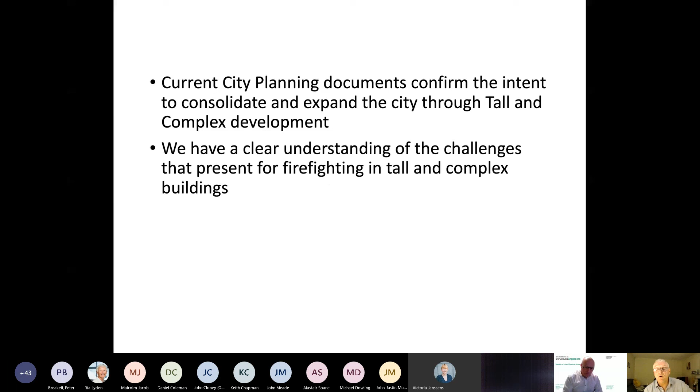Current city planning documents confirm the intent to consolidate and expand the city through tall and complex development, effectively high density development. Dublin Fire Brigade have a clear understanding of the challenges that present for firefighting in these types of buildings, and we've developed opportunities for improving our operations in these structures. We're currently rolling out the skill and knowledge we need to serve the people in Dublin.